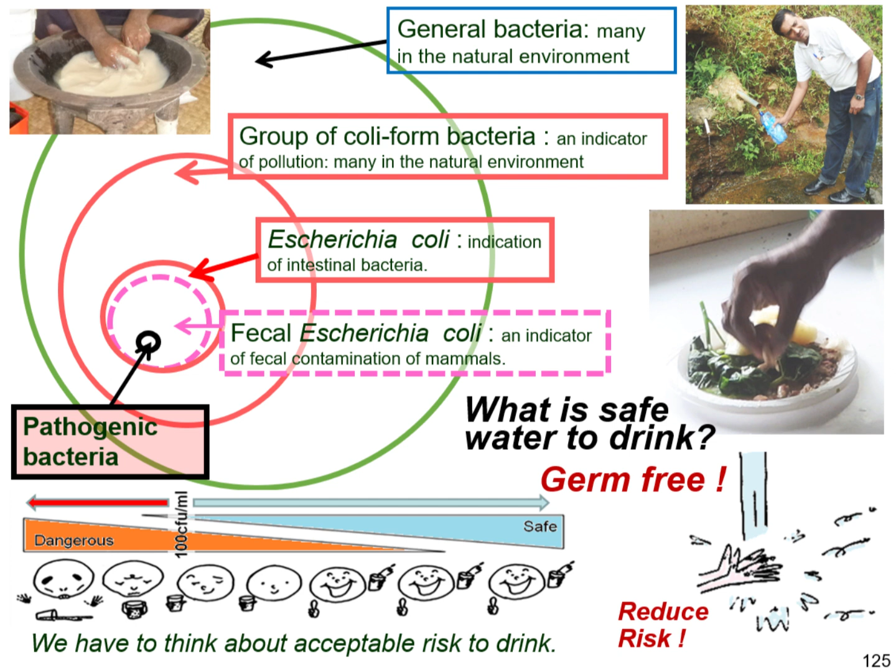In Fiji, the kava ceremony is popular. We have to take this water in villages. We also use our hands to take our food. We have to think, what is safe water to drink? Germ-free? Acceptable risk? Reduce the risk? We have to think about acceptable risk to drink.

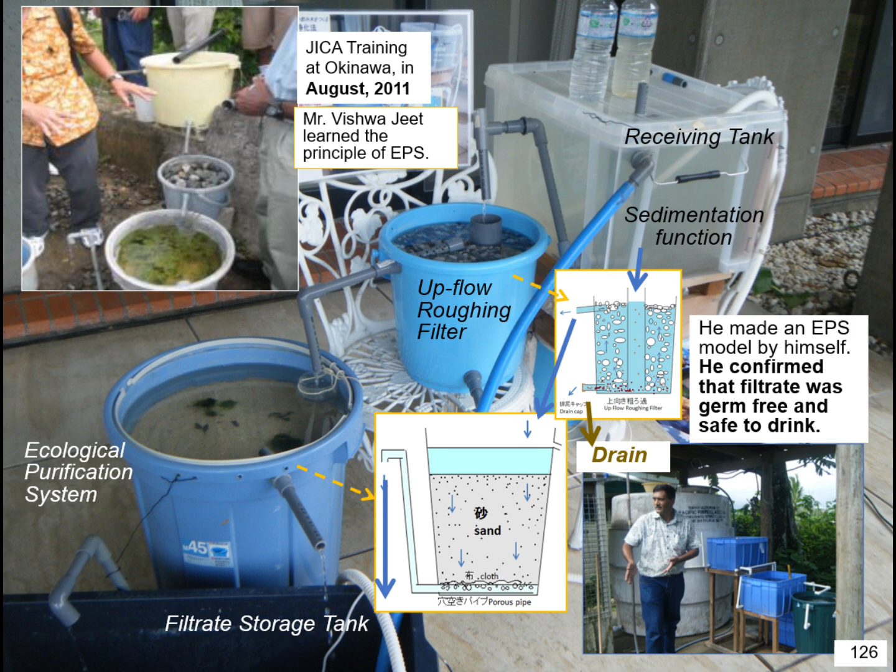JICA training at Okinawa in August 2011. Mr. Vishwa Jeet learned the principle of EPS. He made an EPS model by himself. He confirmed that the filtrate was germ-free and safe to drink. Which level of water do we need? In the Constitution, the right to clean and safe water in adequate quantities. Mr. Jeet confirmed that EPS water was germ-free. We could drink it. The model and the actual plant are different.

A pilot plant was constructed in Kalokolevu village by DWS in 2013. This first actual plant was hard to control the flow rate and hard to catch filter clog. And it was hard to keep the water level of EPS and constant natural flow. EPS water happened to drain off and dry up frequently. And more, by the ball tap, water flow was stopped. Dangerous to EPS function.

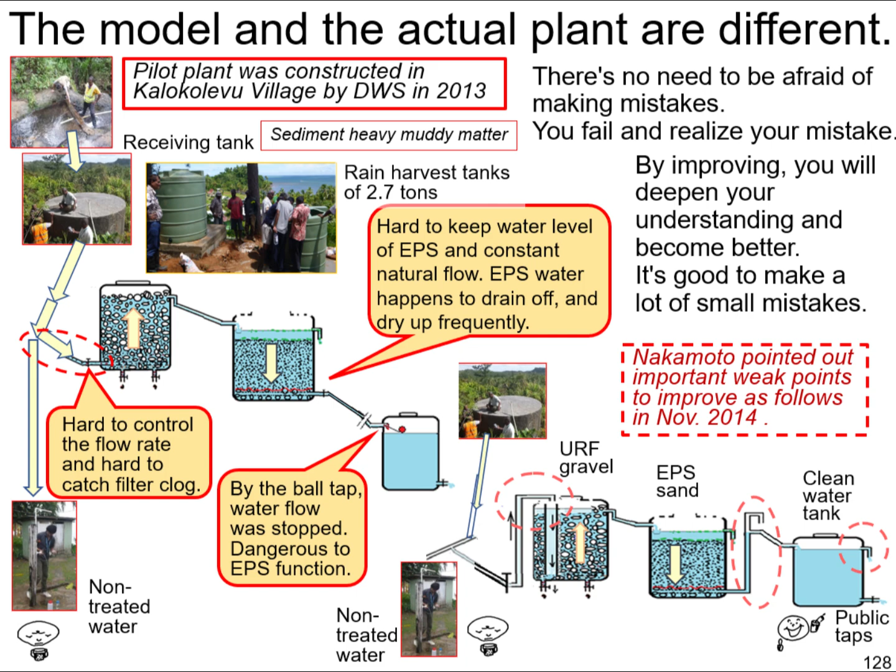There's no need to be afraid of making mistakes. You fail and realize your mistake. By improving, you will deepen your understanding and become better. It's good to make a lot of small mistakes. Nakamoto pointed out important weak points to improve in November 2014. This new practical plant was accepted for the Fiji project. Nakamoto advised the fail-safe system for inflow trouble backdraw in October 2015.

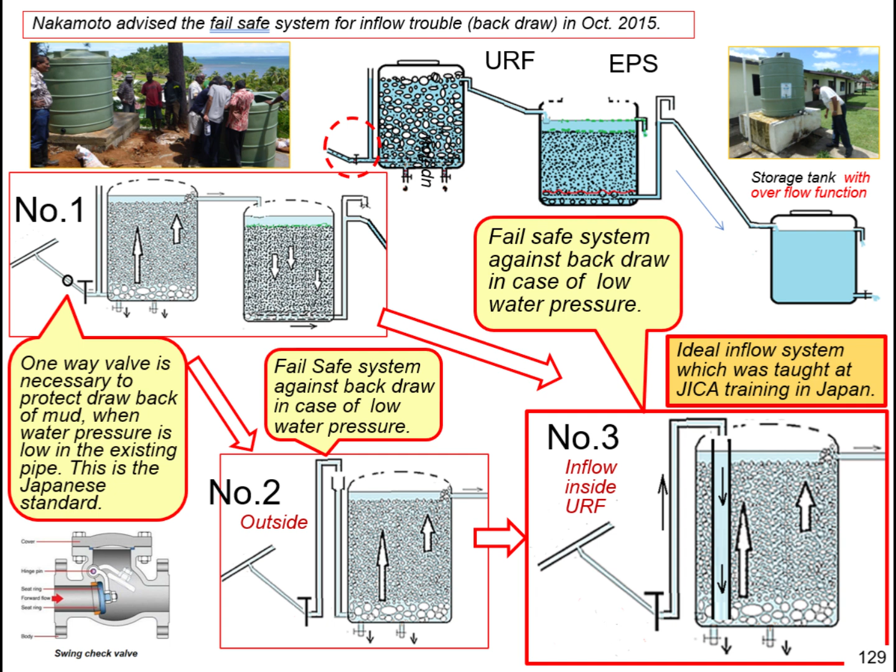Number 1. A one-way valve is necessary to protect against drawback of mud when water pressure is low in the existing pipe. This is the Japanese standard. Number 2. Fail-safe system against backdraw in case of low water pressure. Number 3. An ideal inflow system which was taught at JICA training in Japan.

The present Kalokolevu EPS is hard to regulate, check the flow, and difficult to catch filter clog. Massive overflow from EPS to keep the water level over the sand layer. If the inflow is small, the water easily drains off through the sand layer. The sand surface is easily dried up. This is dangerous to small aquatic organisms. There is a risk of leakage of coliform bacteria in the filtrate.

Repair idea for the existing Kalokolevu EPS. When the inflow system changes to this, flow control becomes easy. This flow system also protects against backdraw to the existing main pipe. Filter clog is easy to catch. Accumulated mud can be easily drained off. The water level over the EPS can be kept by the siphon system for filtrate. This is a natural overflow system from the bottom.

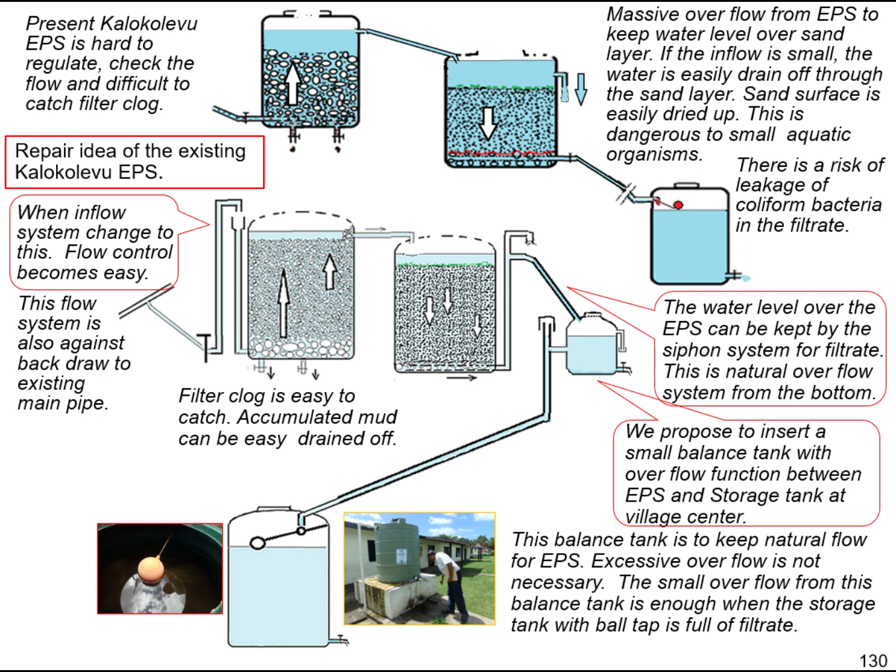We propose to insert a small balance tank with overflow function between the EPS and the storage tank at the village center. This balance tank is to keep natural flow for EPS. Excessive overflow is not necessary. The small overflow from this balance tank is enough when the storage tank with ball tap is full of filtrate.

The capacity of this plant was so large. I advise using more EPS water in a village. 1. A block distribution system for EPS water is recommended. 2. Install more public taps for villagers. 3. Training to save the limited amount of EPS water.

There are non-detected leaks, therefore we have to install an EPS pipe with many public taps in a small village, even up to 200 persons. If there is absolutely no leak problem, we may connect to the present distribution pipe in the case of a small village. But this is risky. I cannot recommend this connection.

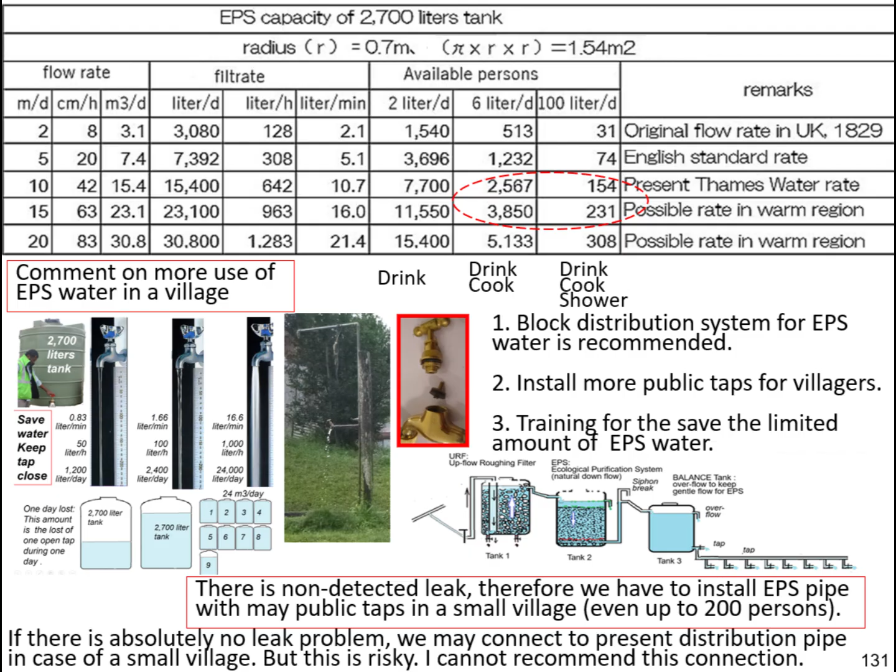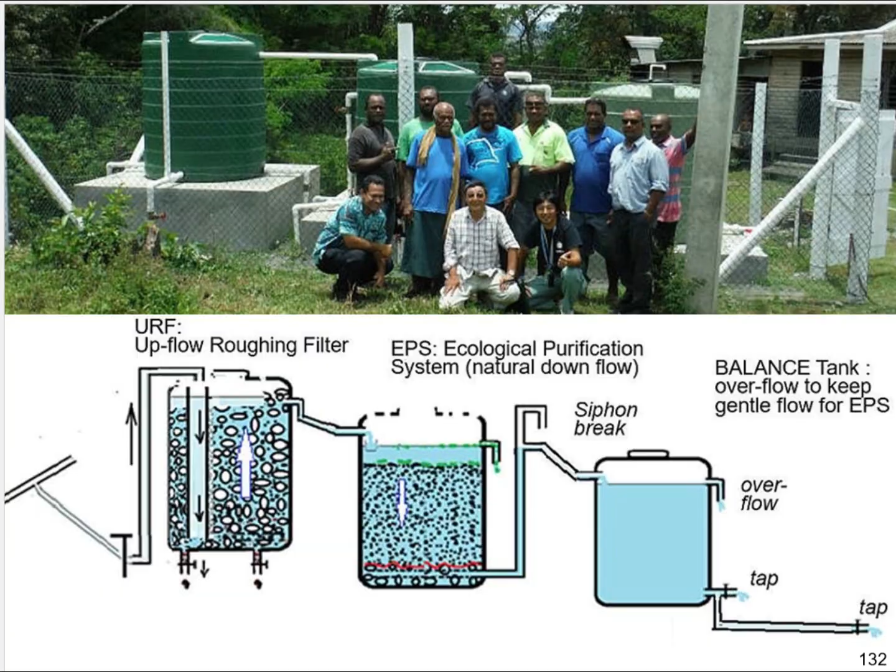I visited to check the system condition in many villages in Fiji. The villagers were waiting for our visit. They welcomed our evaluation. Site visit on 3rd July 2017. Navachini, 500 persons, 120 houses. One EPS plant could supply all villagers using several balance tanks. Comment on more use of EPS water in a village.

Up to 200 persons in a village: install an EPS pipe with many public taps, since there are non-detected leaks. Connecting to the present distribution pipe is risky; I cannot recommend it. 200 to 500 persons in a village: we supply EPS water by a new EPS pipeline with many public taps, or we install additional storage tanks for EPS water and supply it by a new EPS pipeline with many public taps.

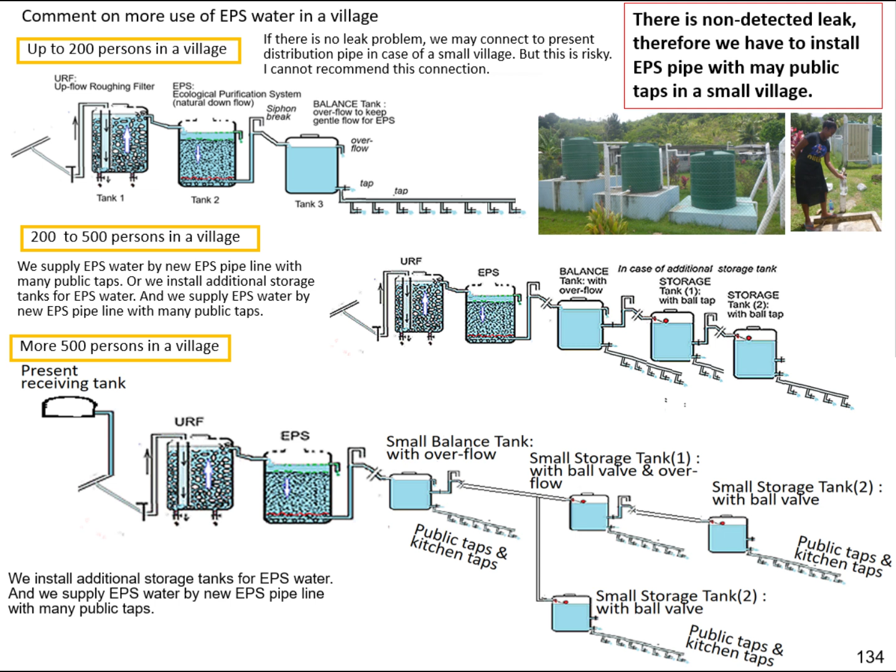More than 500 persons in a village: we install additional storage tanks for EPS water and supply EPS water by a new EPS pipeline with many public taps. World Water Day 2018, March 22nd and 23rd, Lautoka, Fiji. DWS presented an EPS model. A new movement to make larger scale EPS plants arose from the own activities of a rural village in March 2018.

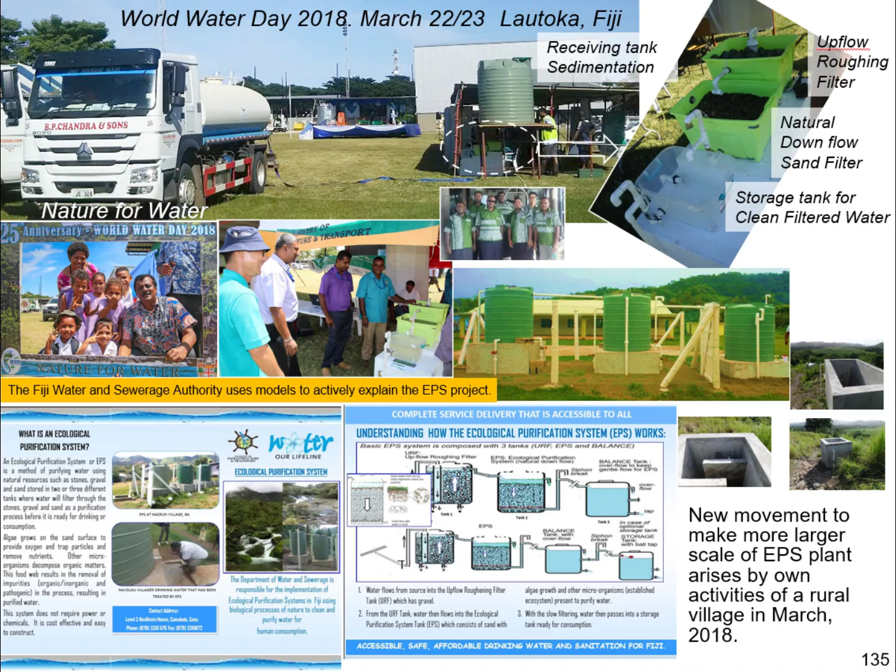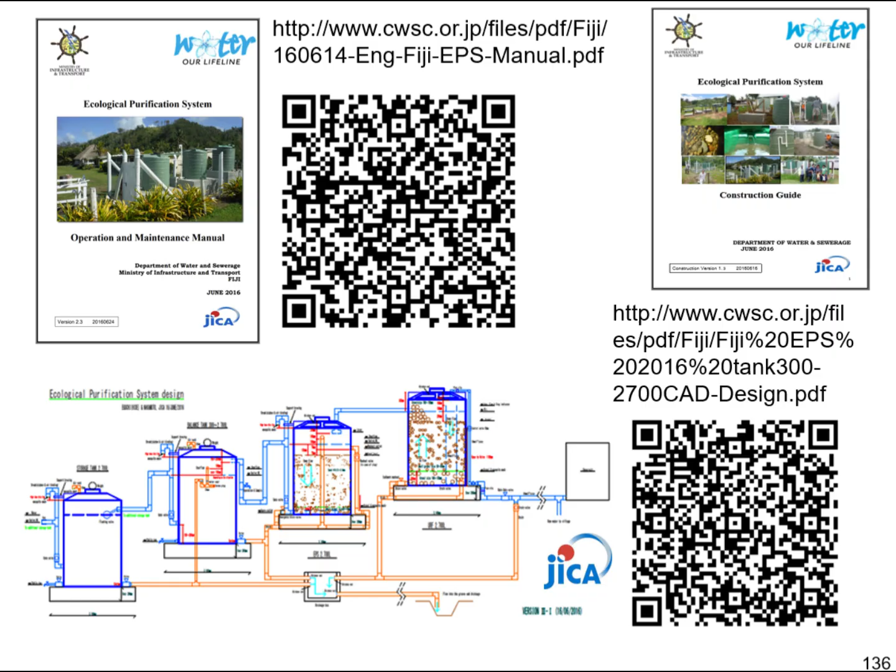You can download the Manual of Operation and Maintenance and the Manual of Construction Guide through the Internet. Please check the QR code or address. In the manual you can easily understand how to take care. An EPS public seminar and workshop was held at the Japan Pacific ICT Center of the University of the South Pacific on 12 and 13 March 2019 in Suva, Fiji. I presented lectures from JICA headquarters in Tokyo. You can download my manual on EPS and my lectures.

Nakamoto contributed from October 2014 to November 2018 as a short-term expert, 8 times on one-month visits during 4 years. Mr. Hidemitsu Iguchi helped head this project from 2015 to 2016, and Mr. Isamu Shiwari helped from 2017 to 2018. During 4 years, 100 EPS sites were completed.